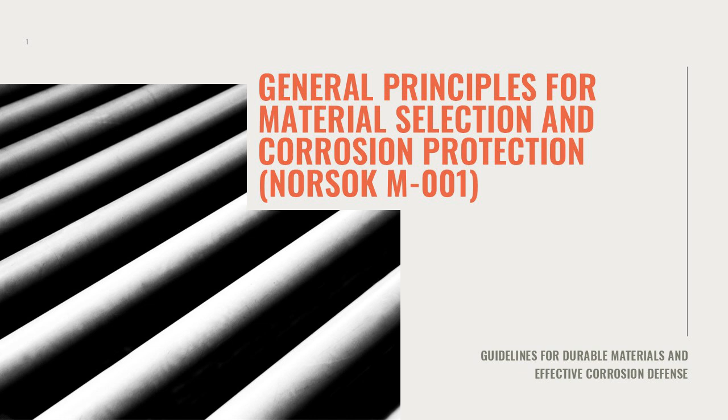General Principles for Material Selection and Corrosion Protection based on NORSOK M-001 Guidelines for Durable Materials and Effective Corrosion Defense. Overview and Philosophy of Material Selection. Material selection and corrosion protection are critical aspects of offshore and onshore engineering projects, ensuring safety, reliability, and cost-effectiveness throughout the life cycle of facilities.

The NORSOK M-001 standard provides guidelines for selecting materials that can withstand harsh environmental conditions, including seawater exposure, high pressures, and varying temperatures. The philosophy emphasizes a holistic approach, considering operational conditions, maintenance strategies, and environmental impact. It advocates for selecting materials based on proven performance, compatibility with design requirements, and compliance with international standards. The goal is to minimize corrosion risks, reduce downtime, and optimize long-term integrity.

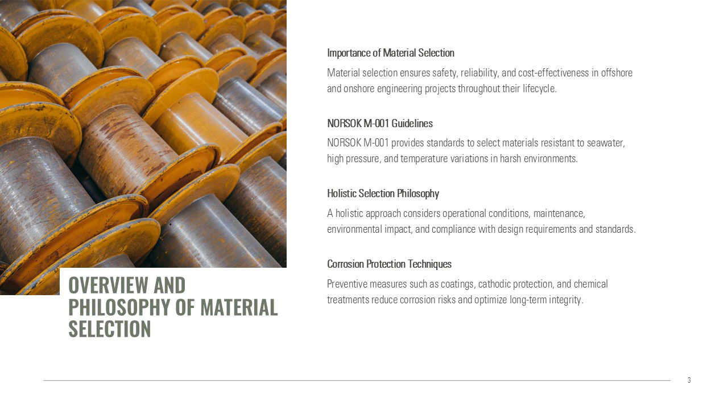This involves evaluating the entire system, including structural components, piping, and equipment, and applying preventive measures such as coatings, cathodic protection, and chemical treatments. By adopting this philosophy, engineers can ensure that materials are fit for purpose, cost-efficient, and sustainable, while meeting safety and regulatory requirements.

Key criteria for material selection. Material selection requirements under NORSOK M-001 involve assessing mechanical properties, corrosion resistance, weldability, and availability. Materials must withstand operational stresses, including pressure, temperature fluctuations, and chemical exposure. Selection also considers fabrication processes, inspection feasibility, and repair strategies. For offshore structures, resistance to seawater-induced corrosion and fatigue is paramount.

Materials should comply with recognized standards such as ASTM, ISO, and EN, ensuring global compatibility. Economic factors, including life cycle cost and ease of procurement, play a role alongside technical performance. Environmental considerations, such as minimizing ecological impact and supporting sustainability goals, are increasingly important. The process includes detailed documentation of material grades, specifications, and testing requirements to ensure traceability and quality assurance throughout the project lifecycle.

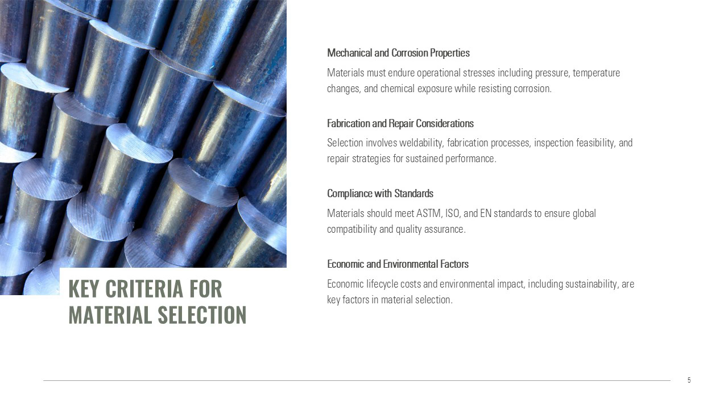Corrosivity assessment and protection strategies. Corrosivity evaluation involves analyzing environmental factors such as temperature, humidity, salinity, and chemical contaminants. Offshore environments present high corrosion risks due to continuous seawater exposure and oxygen availability. NORSOK M-001 recommends using predictive models and empirical data to classify corrosivity levels and select appropriate protection measures. Strategies include applying protective coatings, implementing cathodic protection systems, and using corrosion-resistant alloys.

Internal corrosion in pipelines and closed compartments requires chemical treatment and monitoring. Corrosion protection plans should integrate inspection schedules, maintenance protocols, and contingency measures to address unexpected degradation. Advanced techniques like corrosion inhibitors and real-time monitoring sensors enhance reliability and reduce operational risks. By combining preventive and corrective measures, engineers can extend equipment life and ensure compliance with safety standards.

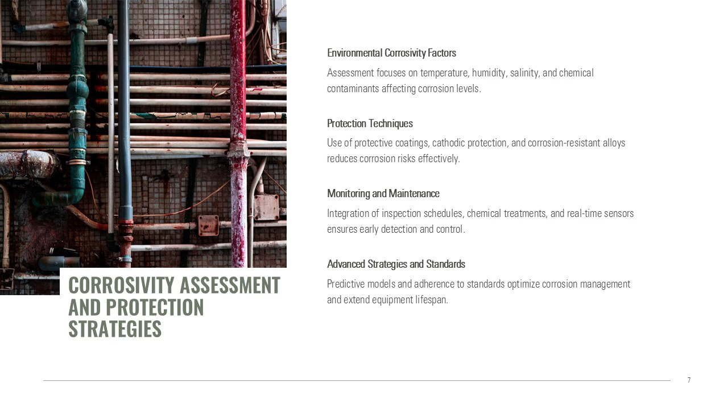External corrosion and splash zone solutions. External corrosion protection focuses on surfaces exposed to marine environments, including structural steel and pipelines. Coatings such as epoxy, polyurethane, and zinc-rich primers provide barriers against moisture and oxygen. The splash zone, located between high and low tide levels, is particularly aggressive due to constant wetting and drying cycles, mechanical impact from waves, and high oxygen content. Solutions include reinforced coatings, elastomeric wraps, and sacrificial anodes for cathodic protection.

Regular inspection and maintenance are essential to detect coating failures and corrosion initiation. Advanced technologies like thermal spray aluminum, TSA, offer long-term protection in splash zones. Design considerations include accessibility for maintenance and compatibility with other protective systems. Implementing robust splash zone protection minimizes structural degradation and ensures operational safety.

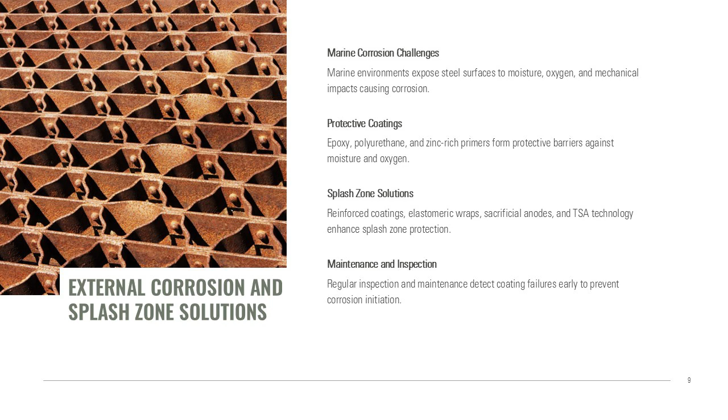Use of coatings and cathodic protection principles. Coatings serve as the first line of defense against corrosion, providing a physical barrier between the material and its environment. Selection depends on factors such as substrate type, exposure conditions, and application method. Common coatings include epoxy, polyurethane, and thermal spray aluminum. Proper surface preparation and quality control during application are critical for performance.

Cathodic protection complements coatings by using sacrificial anodes or impressed current systems to prevent electrochemical reactions that cause corrosion. Design involves calculating current requirements, selecting anode materials, and ensuring electrical continuity. Monitoring systems track protection levels and detect failures. Combining coatings with cathodic protection offers a comprehensive solution, reducing maintenance costs and extending asset life. These methods are widely used in offshore platforms, pipelines, and subsea equipment.

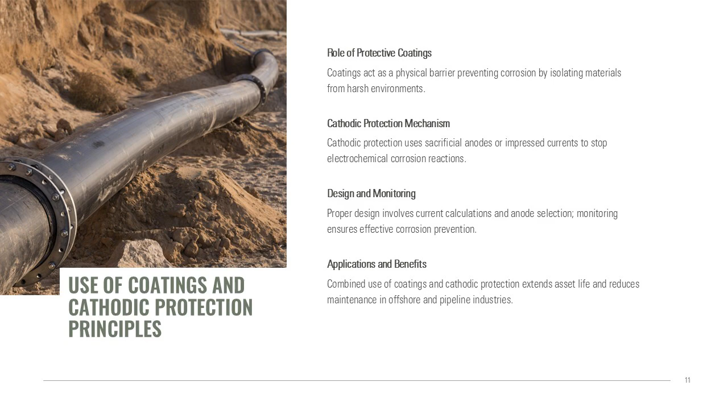Closed compartments, insulation, and atmospheric exposure. Closed compartments, such as ballast tanks and void spaces, pose unique corrosion challenges due to limited access and stagnant conditions. Protection strategies include applying robust coatings, using corrosion inhibitors, and implementing periodic inspection through remote monitoring. Insulation systems, while essential for thermal control, can trap moisture and promote corrosion under insulation, CUI. Selecting non-absorbent insulation materials and applying protective coatings beneath insulation mitigate this risk.

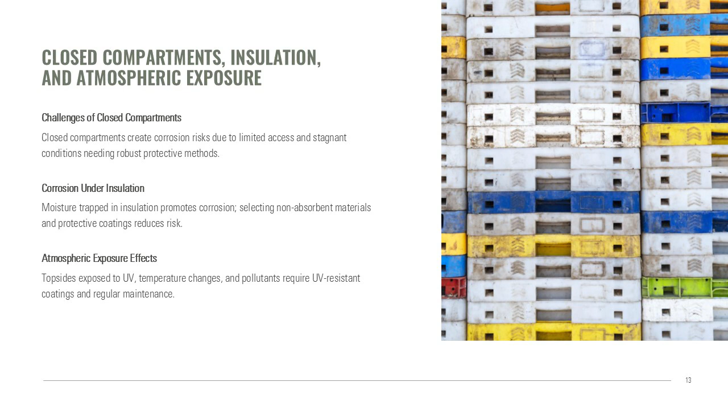Atmospheric exposure affects topside structures and equipment, requiring coatings resistant to UV radiation, temperature fluctuations, and pollutants. Regular maintenance and recoating schedules ensure continued protection. These considerations demand integrated design and operational practices to prevent localized corrosion and maintain structural integrity.

Galvanic corrosion and weld overlay techniques. Galvanic corrosion occurs when dissimilar metals are electrically connected in a corrosive environment, causing the more anodic material to corrode. Prevention strategies include selecting compatible materials, using insulating gaskets, and applying coatings to isolate metals. Preferential weld corrosion is another concern, where weld areas corrode faster due to metallurgical differences and residual stresses.

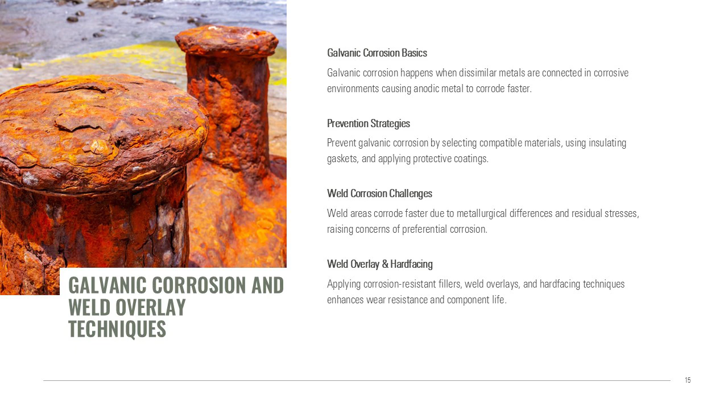Solutions include using corrosion-resistant filler materials, applying weld overlays, and performing post-weld heat treatments. Hard-facing techniques enhance wear resistance in critical areas, extending component life. Proper design, material selection, and inspection protocols are essential to minimize these risks and ensure long-term reliability of welded structures.

Chemical treatment and life cycle corrosion management. Chemical treatment involves using corrosion inhibitors, biocides, and oxygen scavengers to control internal corrosion in pipelines and process systems. Selection depends on fluid composition, temperature, and flow conditions. Continuous monitoring ensures effectiveness and prevents secondary issues such as scaling or microbiological growth.

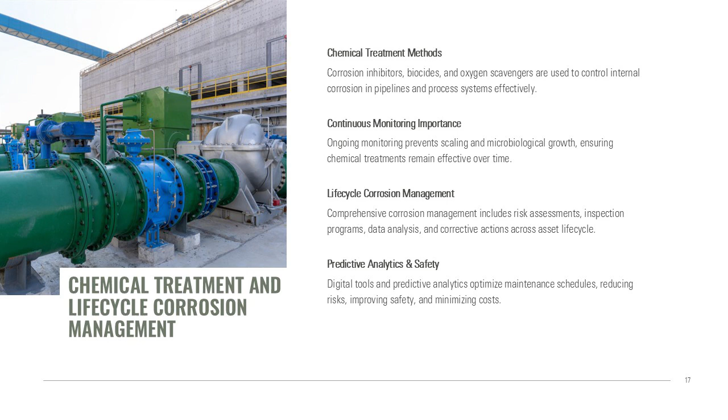Corrosion management encompasses planning, implementation, and review of protective measures throughout the asset lifecycle. It includes risk assessments, inspection programs, data analysis, and corrective actions. Digital tools and predictive analytics enhance decision-making and optimize maintenance schedules. A proactive corrosion management strategy reduces operational risks, improves safety, and minimizes costs, aligning with regulatory and sustainability objectives.

Key takeaways and best practices. Effective material selection and corrosion protection require a comprehensive approach that integrates design, operational, and maintenance considerations. Following NORSOK M-001 guidelines ensures compliance with industry standards and enhances asset reliability. Best practices include selecting proven materials, applying robust coatings, implementing cathodic protection, and adopting proactive corrosion management strategies.

Continuous monitoring and timely maintenance are essential to mitigate risks and extend service life. Collaboration among engineers, operators, and inspectors fosters informed decisions and sustainable operations. By adhering to these principles, organizations can achieve safety, efficiency, and environmental stewardship in challenging industrial environments.